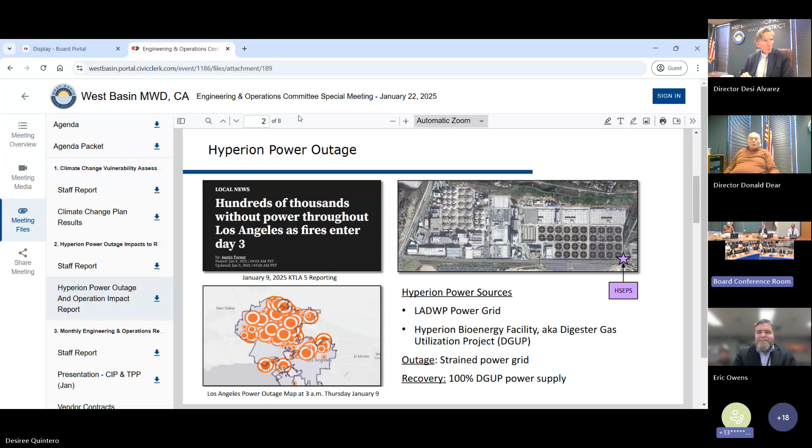If you go to the next page, it has a timeline of when we start switching to different potable water. One thing to note is that even though we notified Chevron refinery, because of fire situations they were not able to get demin units to support the boiler feeds immediately. As a result, even though we had requests for reductions and switchover to potable water for water feed, they remained pretty much at regular demand flow for the rest of the night.

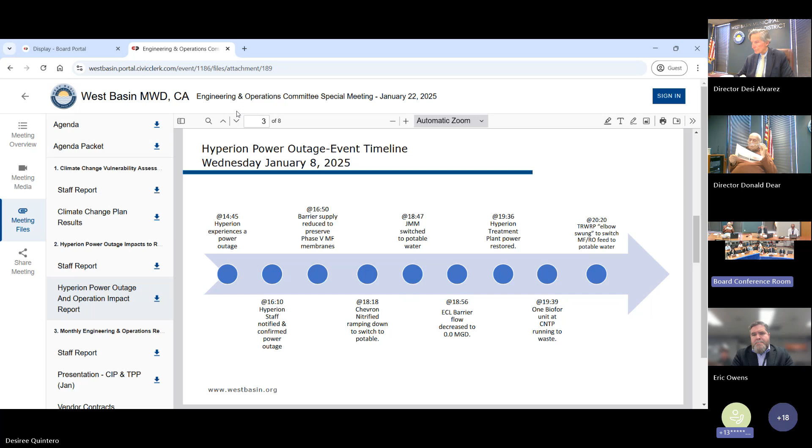I'll go to the next page. The next 2 pages really outline all the different details of the remaining of the event. West Basin staff remained in close contact throughout the whole duration of the event with the refinery customers, as well as Hyperion, trying to get updates on when power will come back and when normal operations will restore.

On this page, originally Hyperion had notified West Basin staff that the cryogenic units, which provide oxygen to their secondary treatment, would come back the following day, January 9th at 8 p.m. However, they failed to do so, and that pushed out their recovery time until January 10th.

We were really happy that we got really close communication with Hyperion. Even though they did have a delay in getting their services back online, they were really responsive to our calls and provided the information that by January 10th, they got all their facilities back online. They did warn us that because of the extended outage, the biology would take a few days before it would recover.

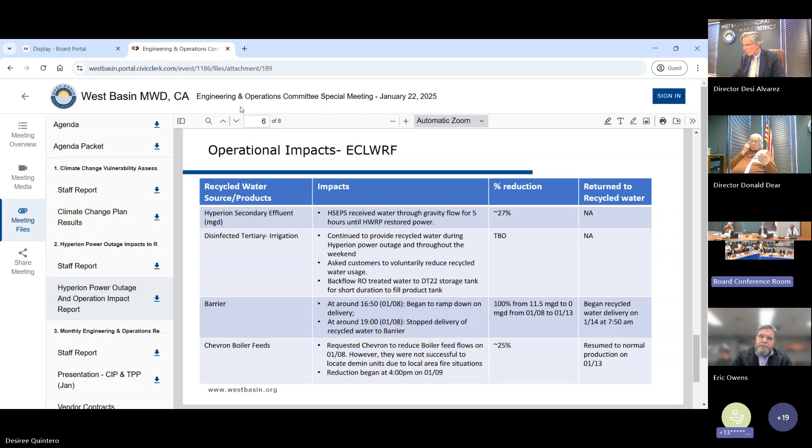Next page, please. Chevron Nitrified was 100% on potable water on their end. So even though we have the ability to provide up to half their capacity with potable water cut on our end, we did request that they be on potable water on their side.

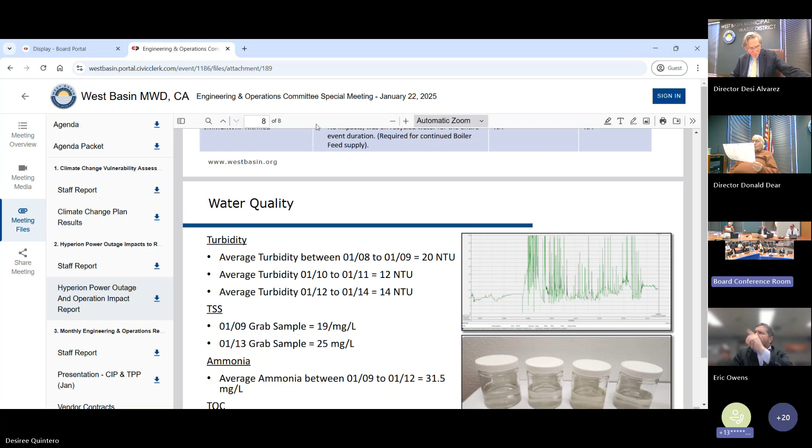Ammonia, however, you recall our normal average these days is at least 55 parts per million. But during this duration, we actually saw better ammonia content, and we reported that to Hyperion staff as well, and they were surprised as well. We have low ammonia.

Another parameter we looked at that determined there was poor water quality coming in was TOC. Normal TOC values range between 12 to 15, and at worst we saw about a 10 ppm increase in the TOC.

But I just want to emphasize that we did have great coordination effort between the customers and Hyperion to be able to avert any major damage to our membranes and other assets.

But what is a grab sample? So it's not continuous monitoring - the operator will go out to the location where we do samples. See those little jars? Those are grab samples.

Or I'd be happy to answer any questions. I'd like to add a little bit if I may.

Yes, you may. You can see this trend on the very last slide of turbidity. And I think what's important to appreciate during an event like this is we're getting information in real time. We don't know how long that trend is going to continue. And the decisions that we have to make as staff and operators of the recycled water facilities aren't necessarily made with the benefit of all this information in hindsight.

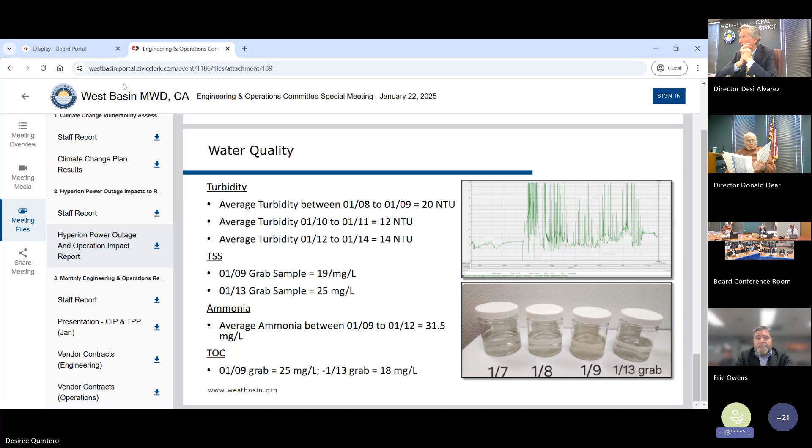Thank you. Okay, so we'll move on to our next item, which is the climate change vulnerability assessment and mitigation plan update. Mr. Chairman, we'll jump back in our packets to packet page 3. For this item, we have Alejandra Canel Alvarado for the presentation.

Good afternoon, directors. This, as mentioned, is an information item to provide an update and present the overall results for the climate change vulnerability assessment and mitigation plan, or climate change plan, as I will call it going forward.

Next slide, please. I want to start this presentation by reiterating that the climate change plan is a requirement set by the Regional Water Quality Control Board, included as part of the National Pollutant Discharge Elimination System, or NPDES, permit renewal process for the prime permit for two of our facilities, the Edward C. Little Water Recycling Facility and the Juanita Millender McDonald Carson Regional Water Recycling Plant.

Aside from that, there are two objectives involved in developing the climate change plan. The first objective is to evaluate both short and long-term vulnerabilities related to climate change hazards, such as flooding, wildfire, extreme temperatures, wind, drought, and sea level rise. Given that the evaluation is specific to these climate change risks, it does not address any other risks, such as earthquakes or pandemics.

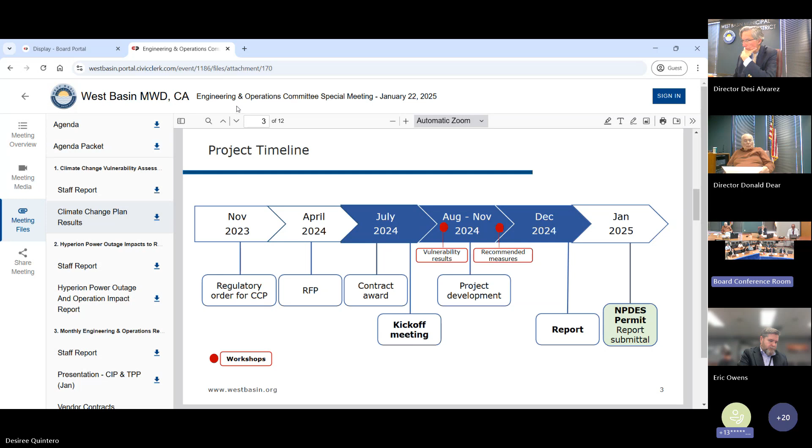To continue this presentation, it's important to distinguish some terms that are used and can be interchanged, but in the context of the climate change plan it was important to identify them. For the vulnerability assessment itself, hazard and vulnerability were the terms required to identify. A hazard is an event or condition that may cause injury, illness, or damage to assets, while vulnerability is a predisposition of the assets to be adversely affected by the hazards, meaning things like flooding or drought, the ones we talked about.

With these two terms in mind, there were two main focuses for gathering information to speed the assessment. The first focus was all the climate data and projections from nationwide, state, and regional sources. Ultimately, these data and projections provided what is called the representative concentration pathways for carbon dioxide equivalent concentrations, the RCP, which means different scenarios based on future emissions and foreseen levels compared to the heating effect in 100 years. With that in mind, there were three scenarios considered.

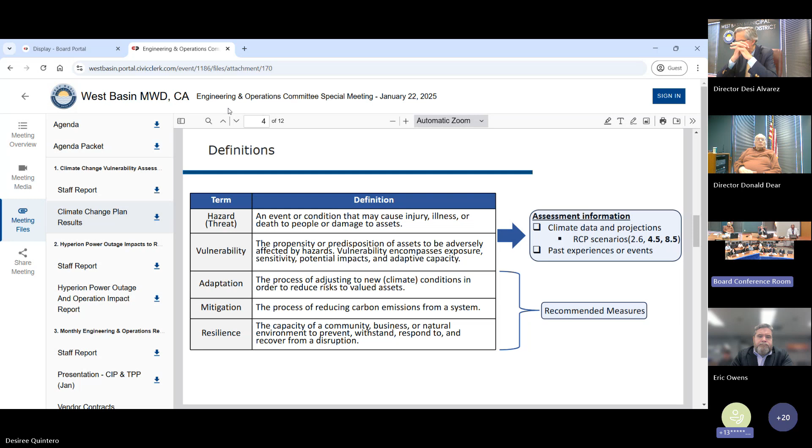The overall results for the vulnerability assessment show that we have a very resilient system based on the hazards evaluated: flooding, sea level rise, drought, wind, and wildfire. For these three facilities, it was ranked as low, meaning the system and assets are relatively resilient to change, marginally impacted by climate change, or less likely to experience significant changes. This is true for most hazards at the three facilities evaluated, except for ECL when it experienced a level of drought.

For this particular category, it was ranked as medium, due to the fact that as we experience more droughts in the region, there are more conservation efforts and more stringent levels for water demand. So less water might come into the system with poorer water quality, which will put some pressure and reduce the availability to produce reuse water supply for a year.

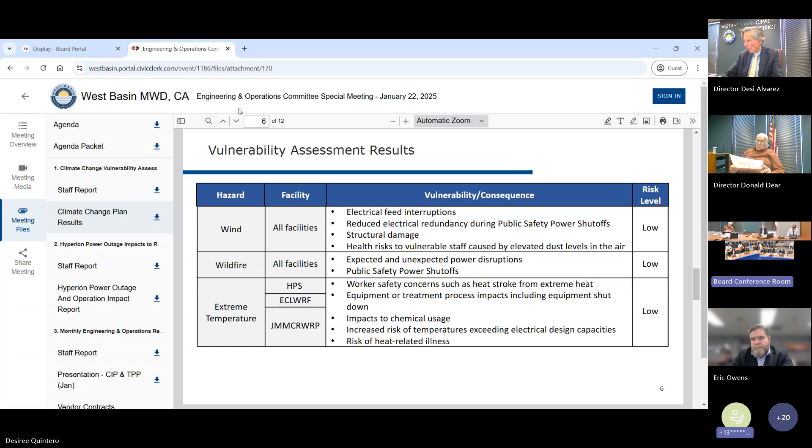Here, similarly, the hazards for wind, wildfire, and extreme temperature are ranked as low, meaning we have a resilient system under the control that West Basin has, and it is resilient to any changes.

Once the assessment was complete, and in order to move to the next phase, which was to develop the recommended measures, it was identified that we needed to have a baseline to see what was the baseline for the greenhouse gas emissions produced by these three facilities. So for that, a greenhouse gas inventory was conducted.

The scope of this inventory took two main focus: direct emissions to West Basin, such as on-site fossil fuel combustion, emissions from treatment processes, and transportation or hauling related to fuel; and the second point is any indirect emissions, such as purchased electricity.

The graph we are seeing here in the presentation presents the total greenhouse gas emissions for the operations of the three facilities, Hyperion, ECL, and JMM, for the data that was gathered for 2023, with the total emissions shown through the bar chart on the primary y-axis and the average monthly greenhouse gas emissions per unit of inflow water through the line chart on the second axis.

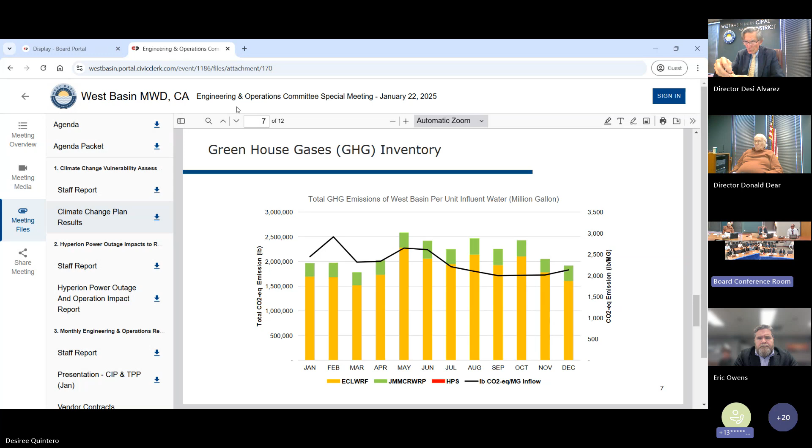Overall, what we see here in this graph is that out of the three facilities, ECL accounts for the largest share of emissions with about 86%, followed by JMM with about 14%, while the Hyperion pump station contributes a minimal 0.01%.

Specifically for ECL, as illustrated in this graph, the greenhouse gas emissions are driven by electricity with about 92-93%, followed by the biosolids hauling and the chemical hauling with like 1%. The biosolids make up about 7%, and this is due to the hauling being in a very distant location by the time the inventory was conducted.

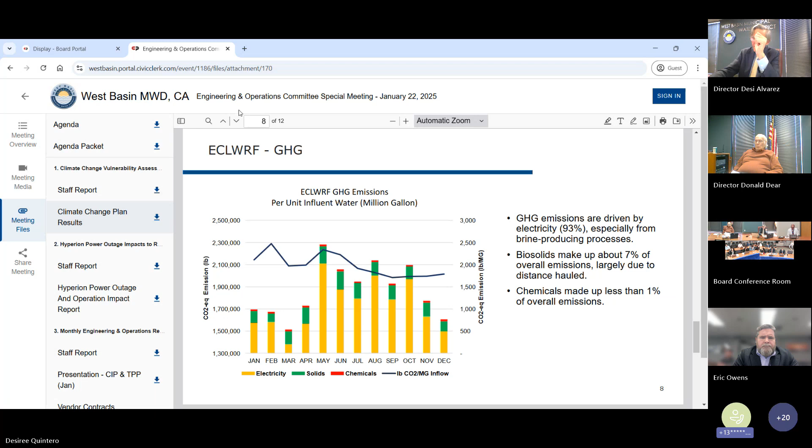For JMM, the greenhouse gas inventory is slightly similar to the one at ECL, having electricity as the main contributor to greenhouse gas emissions with about 99.6%. The chemical hauling has a very small impact with about 0.4%.

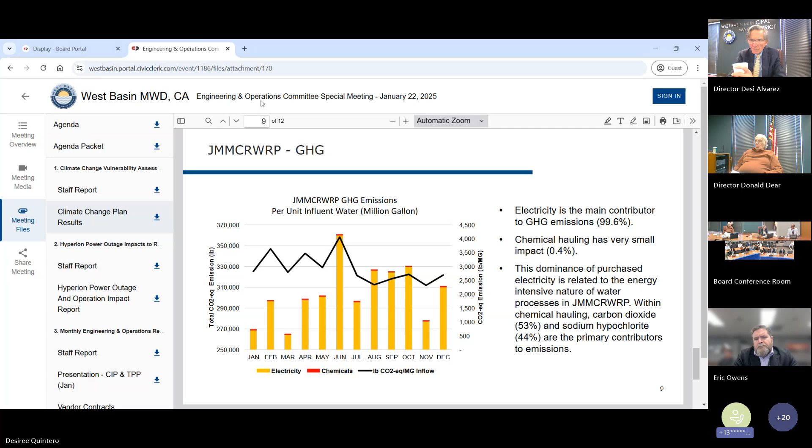After the vulnerability assessment and the greenhouse gas inventory were conducted, an additional component identified where the existing resilient measures were or will take place, as well as the identification of any additional mitigation or resiliency measure. These existing resiliency measures were identified per facility at different levels, whether facility level, building level, or asset level.

For instance, at Hyperion for a building level, the district has already taken some steps into upgrading the HVAC system, as well as for the other facilities. At the asset level, there have already been some projects that involve incorporating shades or canopies, whether for the chemical tanks or the membrane units.

That's the case, for instance, at the JMM Phase 2 project, which did incorporate some of those. At the facility level, we already have some infrastructure that produces a level of resilience, and that was included here as part of these existing measures. Some of those are the storm drainage systems and detention basins that all facilities have.

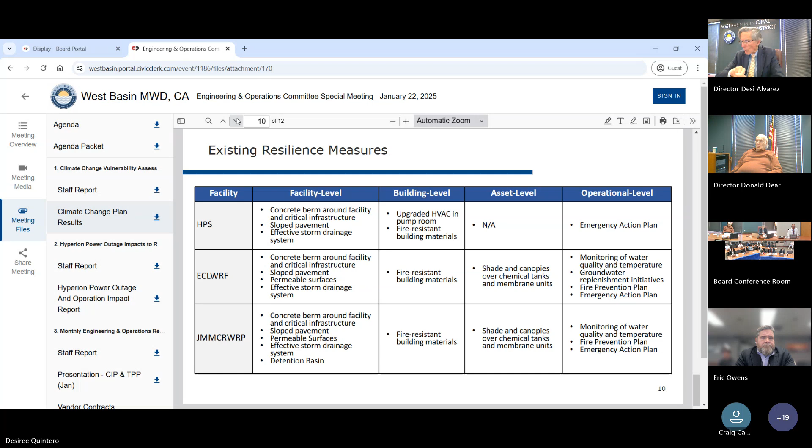So with those existing measures in mind, additional short and long-term measures were identified for the three facilities. For flooding specifically, we looked not only at the projections and the climate database that was involved as part of the assessment, but also specific events that have occurred in the past. That was the case for Hyperion pump station when a previous operational failure during a heavy event caused the Hyperion plant to

overwhelm with debris at the bar screens, and that resulted in some significant repairs that West Basin had to do at the pump station, along with recovery and maintenance. Because that was one odd event that occurred, the priority for these measures was ranked as low. The measure itself here for that particular event was to implement or enhance an asset management program.

Same case with ECL, which in February 2024 experienced some localized flooding around a transformer due to a storm drain backup. This event highlighted a weakness in the drainage system, and for that, regular inspections and maintenance to their storm drain and detention basins, as well as improvements to the transformers, is necessary.

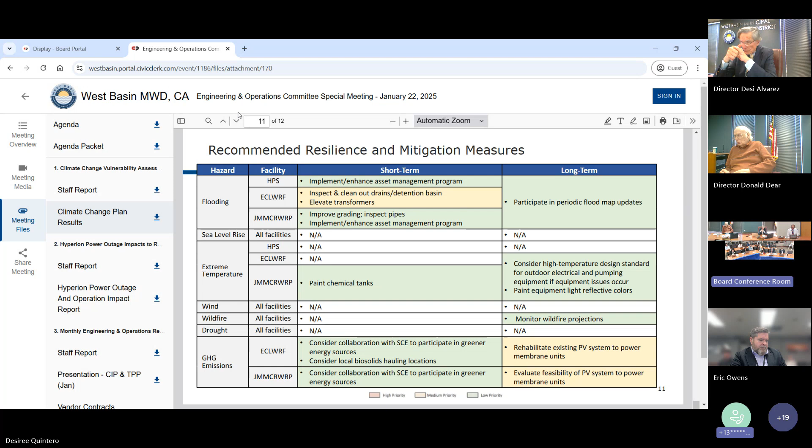As for next steps, as I mentioned before, staff will submit the plan to the Los Angeles Regional Water Quality Control Board for review in late January. Any regulatory comments will need to be addressed to ensure compliance with the NPDES permit requirements, aside from the recommendations that will be submitted to the Regional Control Board. These measures developed in the climate change plan will serve as guidance for future West Basin projects.

With that, I'm happy to report that the completion of the task for the development of the climate change plan was done as scheduled and under budget, within a total amount of $86,000, which represents savings of $37,000 according to the budget.

I do want to note that because there might be some comments that need to be addressed, there is an allocated budget out of the $137,000 that was in the budget. There's about $14,000 allocated to respond to any water board comments, and that is outside of the $37,000 in savings.

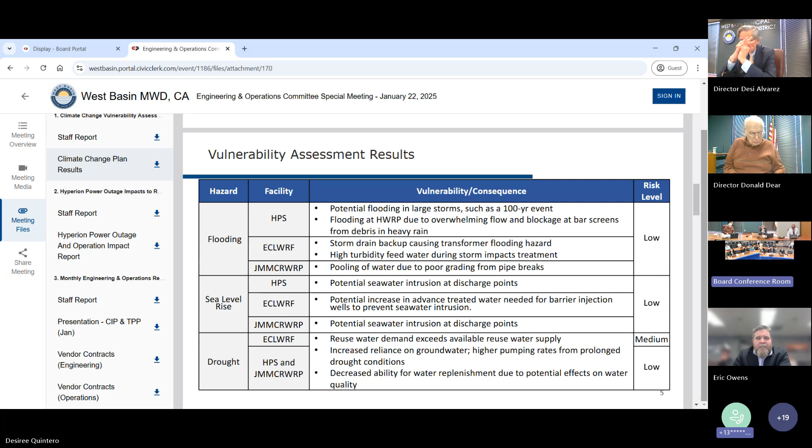Okay, I have a comment and a question. If you can go to slide number 5, where we talk about the vulnerability assessment on drought. Why is ECL listed as medium when all the other risk levels are low? I appreciate that a drought will put some kind of burden on our potable water system, but our recycled water system serves primarily industrial users, which are very consistent in and out of drought. Recycled water would be the same in and out, or it appears that it should be the same in and out of drought. So why categorize that as medium?

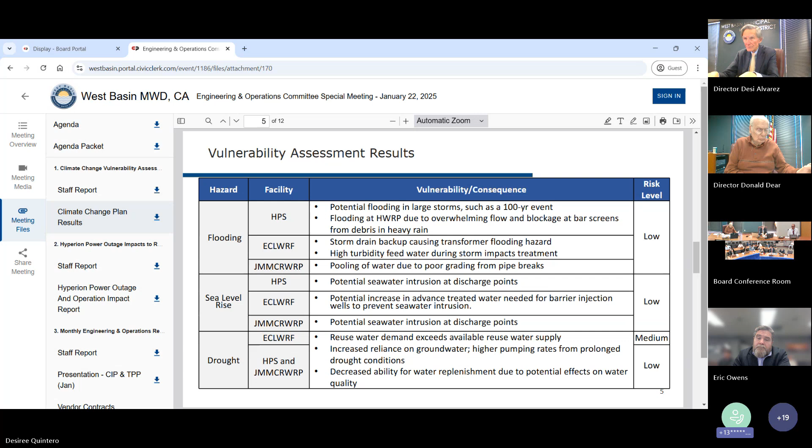Because as conservation increases, there's going to be less water with poor water quality, which could put pressure on the system for West Basin to produce high quality water for the barrier. So in terms of the barrier, if there is a drought and we are not able to produce a specific quality of water, we might need to use drinking water instead. So the drought would impact our influent water flow.

Right, thank you for that clarification.

In terms of flooding, are any of our facilities in a flood zone? They are not. However, because we didn't only rely on the projections, we also relied on past experiences. Given that three facilities have had some events in terms of localized flooding, there were some recommendations to avoid or reduce that risk.

So really, when you're talking about sea level and flooding, it's just to make sure that everything is free of debris so that any rainfall and runoff can move off that property without issue.

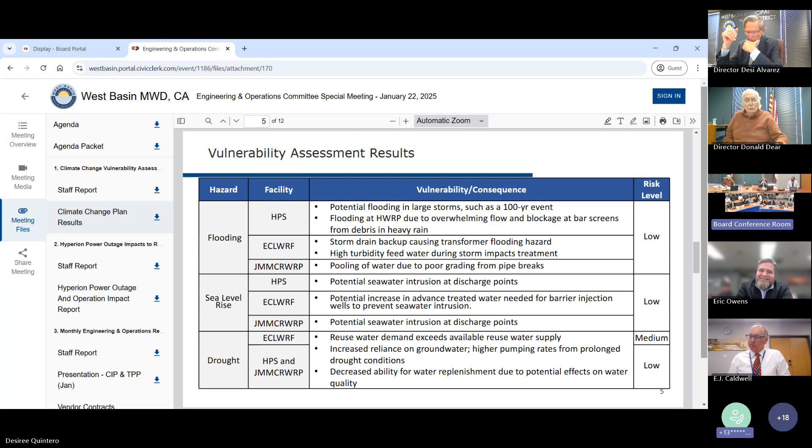Okay, well, thank you. That's all my questions and comments. So we will move on to the monthly engineering and operations report.

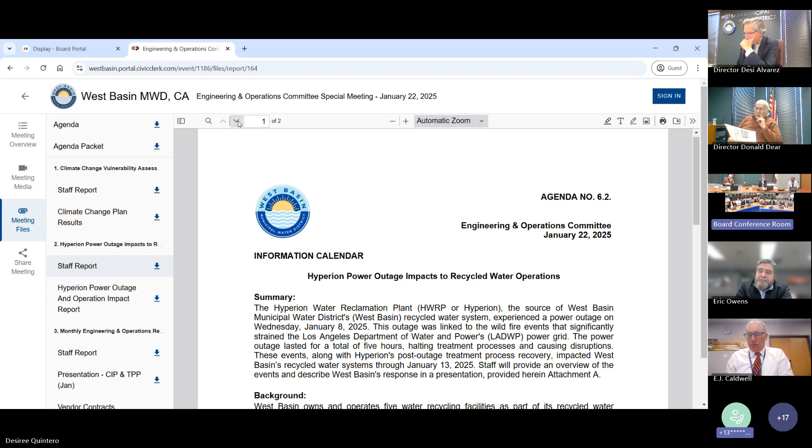We're hoping that with this new format, the information we're presenting is more streamlined, more effective, less redundant. I want to make sure the information we're providing hasn't been presented before and that it's valuable. So welcome all the feedback moving forward in the next few months, if this report needs to be tweaked, added to, or adjusted.

So in this format, today we have a focused presentation on capital projects and some of the technical planning projects. But we've committed to, with every presentation, talking about some of the key issues on operations as well. You'll see on packet page 28 and 29 the typical bullet points about key activities or incidents related to our operations. A couple of them worth noting today.

On packet page 28, we're informed the committee that we have received 4 proposals for the O&M contract, and staff, along with outside panelists, are reviewing them, and we're scheduled to conduct interviews at the end of this month for all 4 firms.

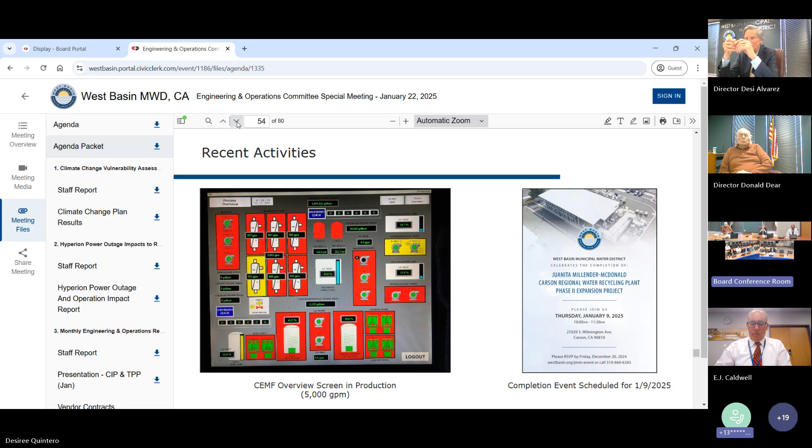Next slide, please. We are all the way through commissioning. We accepted the CEMF on November 22nd. Since then, we've been trying to address miscellaneous issues with different signals coming from different pieces of equipment, making sure everything is running absolutely flawlessly before we take full acceptance of all the recent installations.

Next slide, please. Here's a list of the outstanding items required for that final acceptance. Most notably, we need accurate as-built drawings from the contractor. The final piece we're working through is the electrical drawings. We've gone through 5 different resubmittals with them, with me having to go out there and count wires, count conduits, and make sure they're right. Unfortunately, we're getting a little pushback from them on editing them, again for the 6th iteration, however stressing to them the importance of having accurate documents at the end. Additionally, just the regular things: punch list items, cleaning up lead tags, and addressing any equipment that's not operating correctly.

Some of those are just being tracked as punch list items and will be transferred over to warranty items. All things that are pretty per usual with operating equipment.

We'll do a final site cleaning before they demobilize, and we're just waiting on some of the final administrative documents, which are still lagging a bit, but they say they're forthcoming. Our final system documentation submittals, asset management sheets, maintenance summary, and lubrication records.

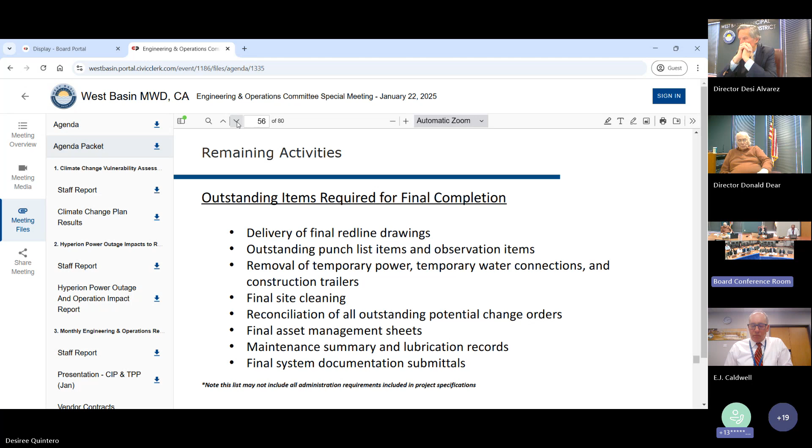This project actually started back in August. We issued a notice to proceed August 1st, 2024. Agenda packet page 64, thank you Director Dear.

The first activities for this project were to actually drain the filters and go in and do some field measurements. As you may recall, the key component of the project is the under drain stainless steel laterals, and those are actually custom made and specific to the filter dimension and so forth. That was performed about two weeks into the notice to proceed.

Those shop drawings were then verified by AWI, the manufacturer, which we sent to them, and just last month, at the end of December, we received the material and it was delivered to site. That was actually the longest lead item for this project. With that being said, we then scheduled the contractor to mobilize last week, January 13th.

Right now, the first activities on the project are, as you may see there on the second bullet point, filter 8 is offline right now. Filter 6 is also offline, so we're working there, removing some of the media and also performing the crack repairs on the north walls of 8 and 7, as you may recall.

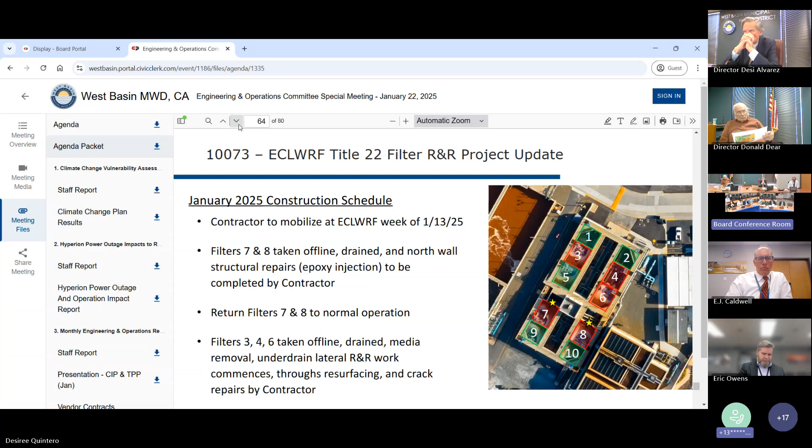Here are just some pictures of the actual filter bays. On the left, filter 6 is offline right now, and the reason that one's offline is because the earlier operators noticed that the media has been lowering, which basically tells us that there's an underdrain failure. So that filter was taken offline last year.

The cracks on filter 8, we performed the structural analysis on that, and the recommendation was to repair those cracks and perform an epoxy injection, not just on 8 in the middle that has some of the longer cracks we're concerned about, but also cracks on filter number 7 north wall, pictured on the right.

There are some cracks there. They're not as heavily visible as on 8, but obviously a concern, and we'll be doing the epoxy injection. The task right now is we're doing scaffolding along those walls, about 20 feet high, to allow the contractor to do that work.

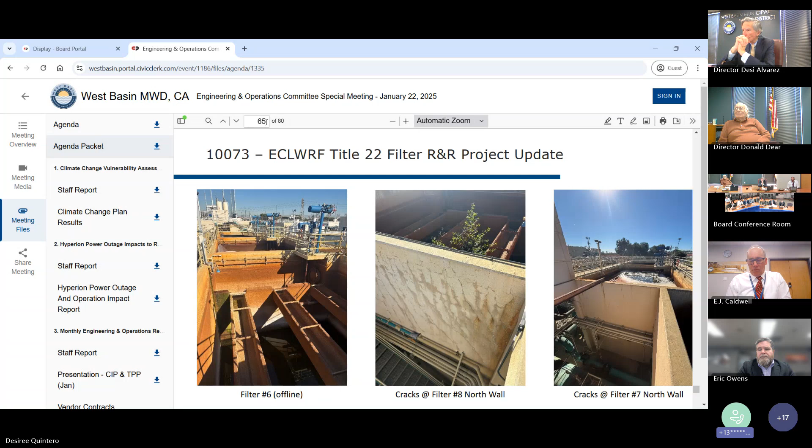With that, that concludes my presentation, and I'd be happy to answer any questions from the board. Thank you. Any questions? Director Ray, any questions? No, thank you. Thank you.

Directors, you may know that our Biofor systems are used for the nitrification process for the water that we send to the cooling towers. We rehabbed the Biofor system close to 10 years ago when the performance was going down. We trended down. And more recently, since the Hyperion upset, we've been noticing their performance going down too. We've received some requests from our contract operator to consider rehabbing those systems again.

And so Mir is going to talk a little bit about the water quality and the system's performance. Mir? Hello, members of the board. So this is on page 69. I'll be presenting a study regarding the Biofor at each of the satellite plants.

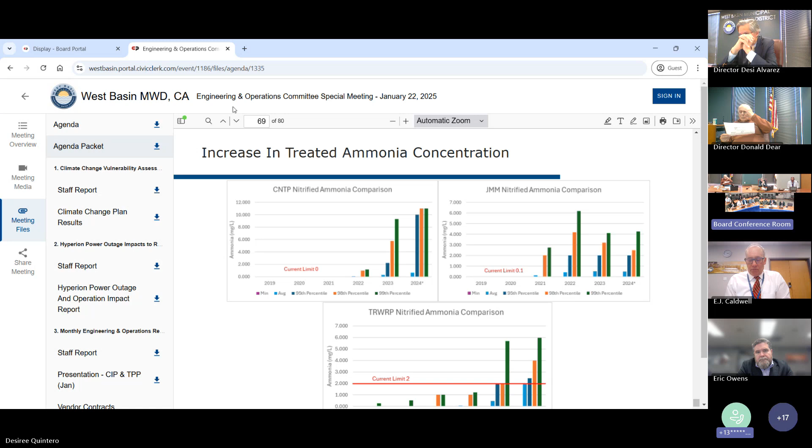I would like to note also that all of the current limits are being surpassed right now, at least according to those graphs. We are adding chemicals to stay in compliance, but this is increasing the cost of the plant. Next slide.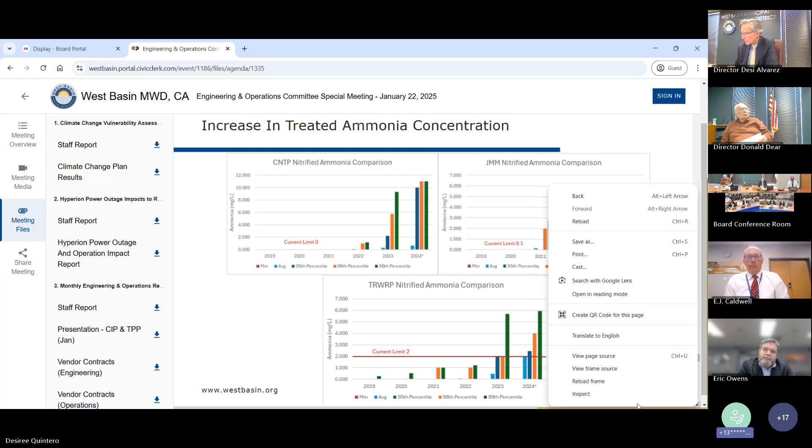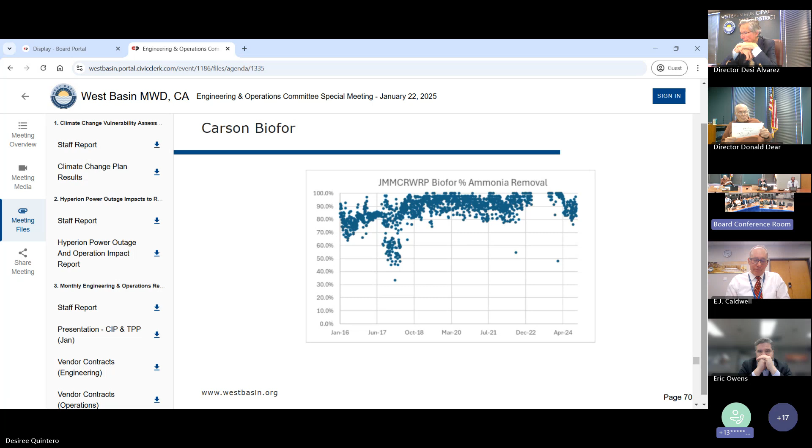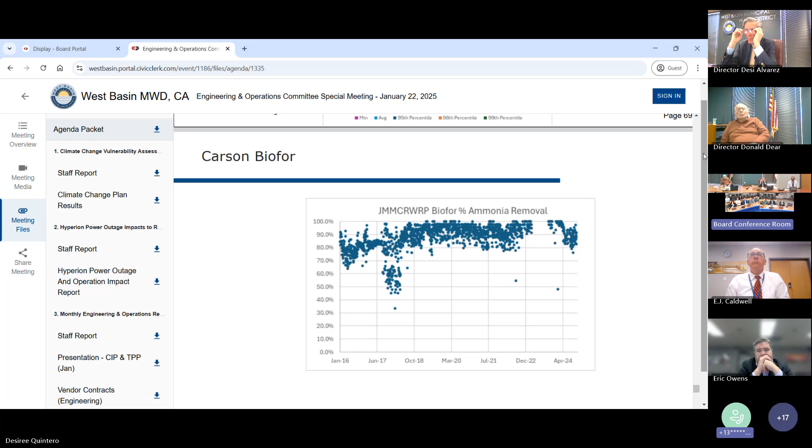Starting off with the Carson Biofor, the Biofor at the JWPCP facility, there's only one, but looking at the past 8 years, from 2016 to 2024, it's been pretty consistent with the percentage of ammonia removal. But this Biofor is not exactly the best one to study because we're currently operating it at reduced capacity, and therefore we don't really know exactly how much max capacity has been affected over the previous last few years. The next few slides will show that in more detail. If we can go to the next slide.

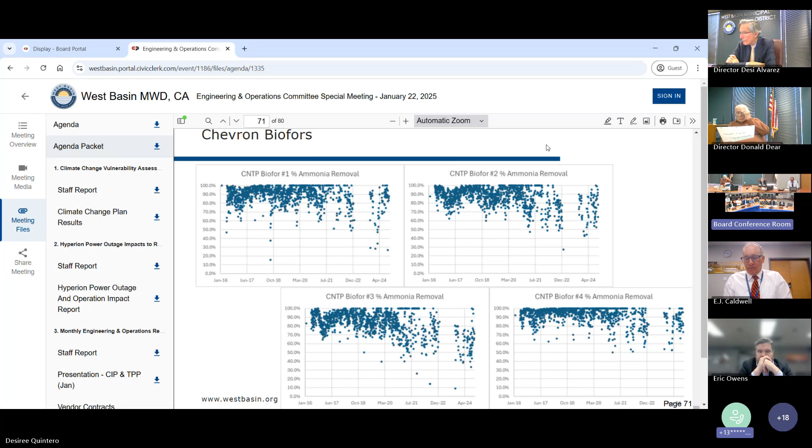So the Chevron Biofors, we have 4 of them. Currently, if you look at the 2021 date there, that's sort of marking where it's starting to decrease from the past—2016 to 2021 was pretty consistent, and now it's decreasing. This is very evident, at least in Biofor number 3, which is the worst performing one out of the Chevron Biofors, and it's just not boding well for these ones. Next slide, please.

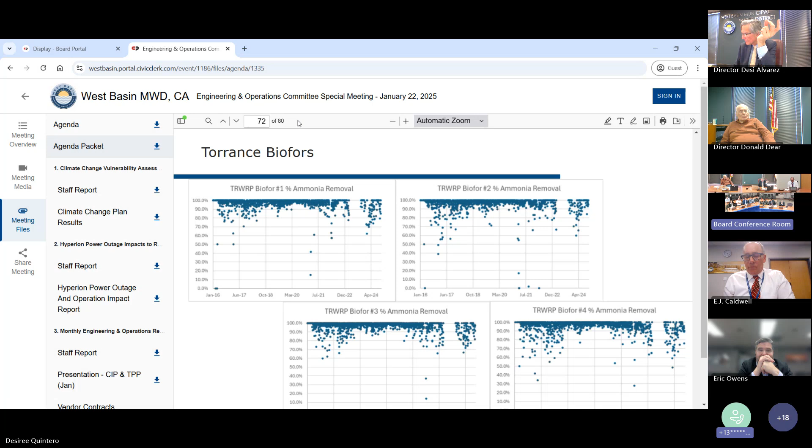So thank you. Any questions? On that one slide, why the gap in '23? We did have issues with our EDS system, for which we collect and monitor data over an extended period of time. The Biofors were operating, we just were not able to collect any data. It's worth noting that one of the impacts here is that we end up using more chemicals to maintain the specification that our customers expect at each of the nitrification facilities.

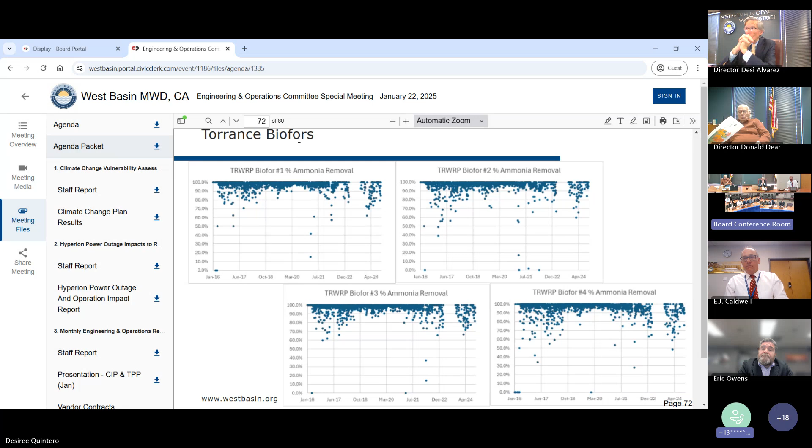Any questions or comments, Director Dear? And Director Gray? All right, well, thank you very much. It was a very nice presentation and congratulations.

LA County Sanitation is a big organization. What division are you going to be working in? Wastewater collections division, basically plant stations. Good luck to you, you'll have fun there, and take advantage of the organization—move around. Thank you.

Okay, unless there's any item that staff would like to present that needs special consideration by the board, I would only say that there is a very brief summary in the presentation about the term sheet for Pure Water SoCal. We plan on coming back to the committee and the board next month to talk more about it. That is a term sheet towards a water purchase agreement that at some point we would enter into with Metropolitan Water District. So something to just point out for the committee—just a little heads up for next month.

Okay, well, thank you. All right, with that, any closing comments from our directors? Things are well organized in this division. Director Gray? Yes, just thank you to staff and everyone who reported, and the representative from LA Sanitation. Thank you. I don't have any further comments. Thank you, and this meeting is adjourned. Thanks, everyone. Thank you to our newest member of the commission.